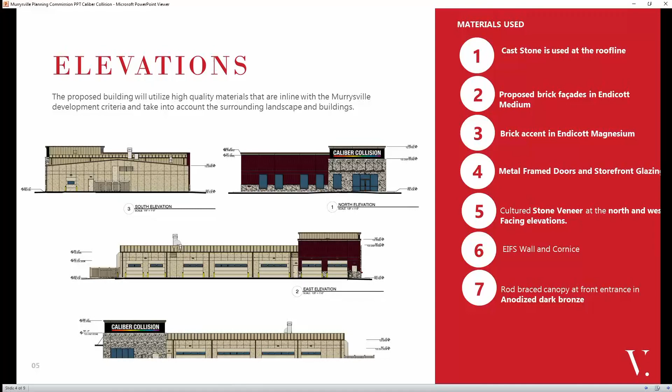Public parking spaces, I should mention, are used for employees. If there's an overflow situation, Caliber will open their gate and allow employees to park in the back. There's really not a whole lot of need for public parking - it's just used for employees.

Okay, what else do I want to mention here? We've got the stone veneer. And again, we can talk about—go ahead.

I have a question. Yes. Caliber Collision, is that a lighted sign? It is an illuminated sign, yes. But it can be—I don't think we've really gotten into that, Jim.

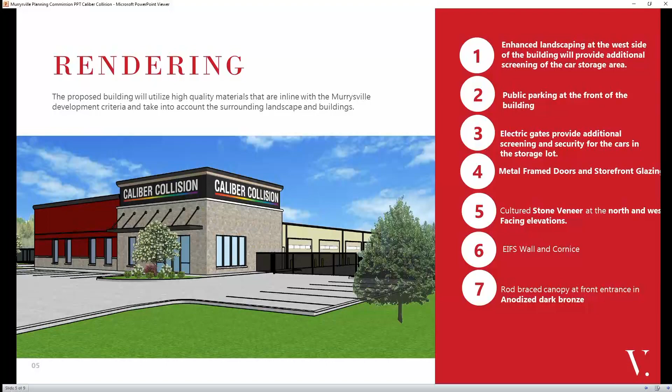No, that's—yeah. It can be individually illuminated channel letters, it can be reverse halo lit. We haven't gotten into that yet, but we will meet your code standards on that.

I'm just concerned about the residential backyards of the folks that are your neighbors. Sure, and I'm sure they don't want to see that lighted sign on Saturdays and Sundays. Sure, and that's something we can work with - whatever standards you have when we submit the sign package, we'll meet those standards.

Okay, not a problem. All right, will you go to the site plan if you can? Again, I want to show these items. Jonathan Barron is here with me from the EADS group, he can answer any technical questions you have. But I want to show you the site plan layout.

Again, the majority of the parking you see here is for car storage. The parking up front is for public and/or employees. You'll also note we're proposing a new access driveway from the highway. I want to let you all know that we have been working with DOT.

We've already had a preliminary meeting and made our first submission to PennDOT for plan review. We have comments that already came back. Those comments were, at the risk of sounding hyperbolic, very benign, very boilerplate. The only real anomaly was that they wanted us to pursue an embankment permit, which we will handle. So no major issues, no public improvements, nothing from DOT other than to meet their standards as you see here.

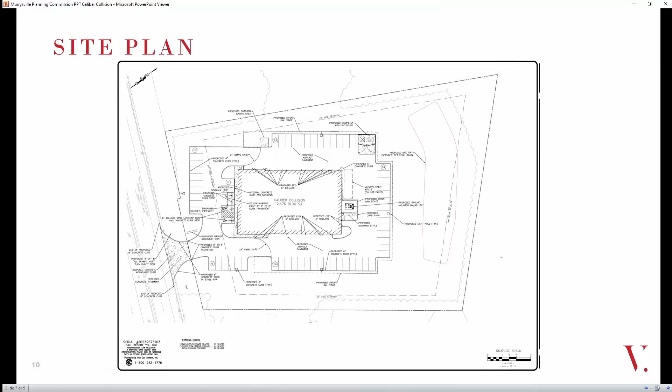The next one I'm going to show you is our landscape plan. Again, the landscaping shown here is per the ordinance, the standards in the development code. You can also see the grading on here, which we can touch on with Jonathan. You can see the retention pond at the back and landscaping all around the perimeter of the site.

What's the purpose of that diversion ditch on this side of the landscaping? That is to collect the water and redirect it around the pond, because if we took the water from the residents, that'd be additional stormwater we'd have to account for in the pond. And where's the outlet for that? There's a rock energy dissipator at the end. So it's not going into a stormwater system? No, it would then naturally sheet flow out the back towards the stream. There would be riprap sized at the end, probably an R4 or R5 riprap, sized based on the velocity we'd anticipate for certain storm events that meets the NPDES requirements.

Why is the ditch close to the property line when it could easily go down the slope at the top of the cuts you're making? Well, stormwater has been quite a challenge on this site from a water quality standpoint. Since we had zero infiltration, we had to make the pond as big as possible on the site and redirect everything away from the pond as best we could. We looked at a lot of different options, and even collecting that additional area made the stormwater pond close to not meeting all the release rate requirements built in for Turtle Creek.

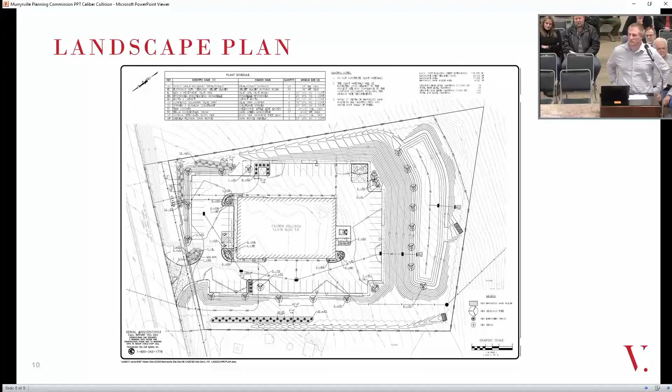So the diversion ditch doesn't really need to be up there along the property line. It could be located further away. We could take a look at it, but I know our requirement is to meet the stormwater standards. I think, to Bob's point, it would help your stormwater if you move that ditch closer to your grading - less water would be going to your detention pond. And that moves it further away from the neighbors, and keeps you off the property line. Yeah, we could take a look at that. I don't see that being a major issue.

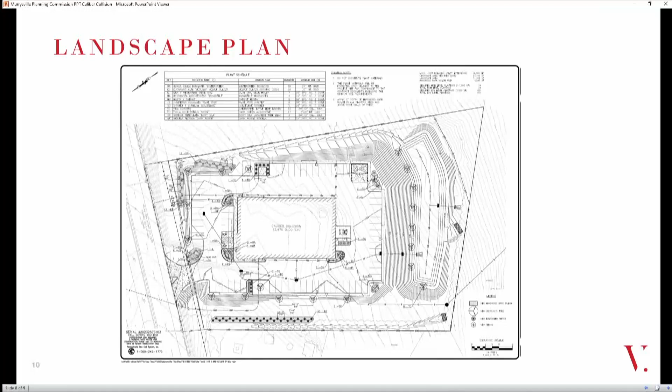So this is your landscaping plan, and I noticed you stopped the arborvitaes - you don't go all the way back with them. What about the other property owners, since you only went halfway? I don't know if you're familiar with Pittsburgh and deer, but those arborvitaes aren't going to be there, so you're going to need something else. Jim mentioned possibly swapping those, and I don't think we'd have a major issue swapping those out for whatever plant you guys would prefer. I saw on the plans those were 6 feet high - I think you're going to need something a little higher. Just my suggestion.

As far as grading goes, we'll try not to take out every tree possible if we don't have to grade in that area. We're only going to grade what we need to. That's why we mostly kept that area undisturbed, because we were trying to keep that buffer between the residential area, understanding there are residents there. The building is 101 feet away, so we meet the requirements for building buffer.

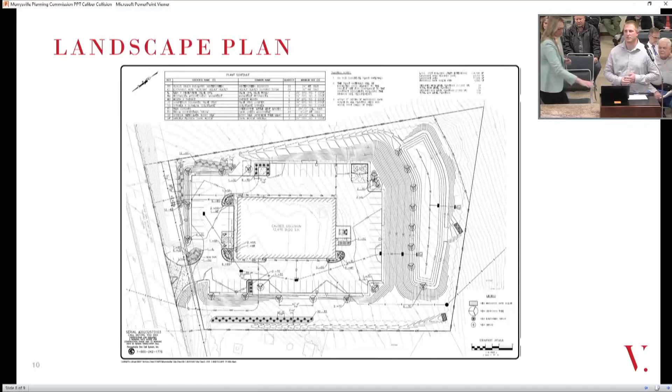How tall is the building? Is it 30? No, 20? Yeah, 21 feet. And I think we're about 10 feet below grade from the adjacent grade of the property at the corner there - the building's about 10 feet lower from a grade perspective. Continuing - the main portion, the service portion of the building is 22.6 feet, and the pediment at the north elevation is 26 feet in height.

26 feet. Yes, ma'am. That's okay.

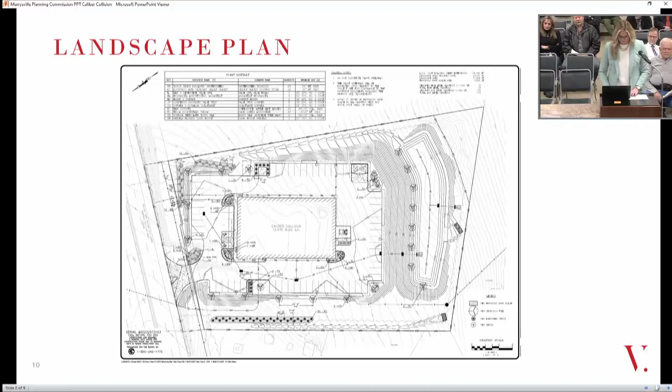I think the last thing I want to show, if you can advance it, is the photometric plan. I know it's a little small here, but I hope everybody has it in their packet. Most of the building lighting is for security purposes, and again, everything is on a timer - the site lights and the building lighting. If there's a concern about shielding it, that's something we can work with everybody on. But what's depicted here shows that the light levels at the property line are 0, which is a requirement per your code, and we fully meet that.

Okay, and with that, we'll conclude our presentation and take any other questions you may have.

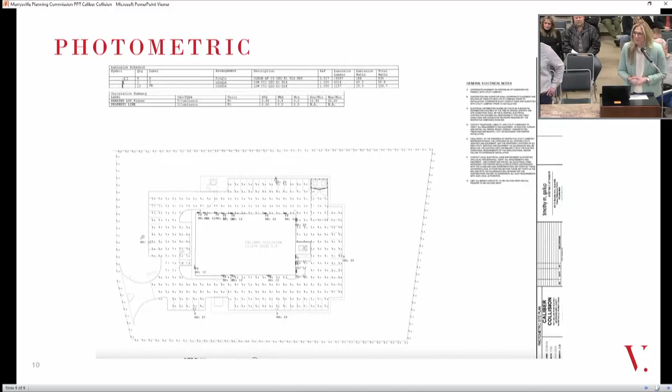The one elevation showed a stack on top of the building. That's for exhaust? Yes, sir. So what's the filtration? What's the effluent coming out? So there is a paint booth, and that is the mechanical equipment that mitigates and controls that.

I think part of the request that Jim had noted was that we provide an air quality study, so we will provide that, but the equipment is state-of-the-art. It meets all the necessary requirements for environmental standards for effluents.

What is the status of your permitting through DEP for the paint booth? I haven't submitted that yet. We haven't kicked off all of our details yet.

Okay. Yes. Bob, do you have something you wanted to ask? No, she's done with her presentation. I'm sure planning commission had several questions.

Yes. So in looking at the plans, I noticed that the sewer line is coming up on the west side of the building. What's the plan for when you get your subdivision for the next lot? Why not bring that sewer line straight up the middle with a main so it could be utilized by the other lot? Would you be able to bring up that plan?

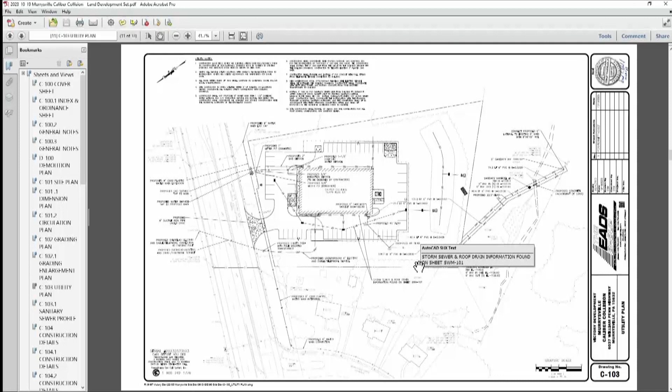Well, a main line extension is a different thing than what we're doing. We're basically just taking our lateral underneath the stream. We've had a lot of discussions with Bob Swarmer over at FTMSA, and it seemed like that made the most sense - it's kind of a straight shot to the stream. We even did a sanitary sewer lateral elevations study, which was part of the plan submission, so it's a straight shot from the building to tap in close to where that manhole is.

We had 3-foot clearance underneath the stream, so we don't have to concrete encase the pipe. We did look at moving it the other direction up the line, to the west, but we weren't able to get that to work, so we had to move it further down. We did reach out to Bob Swarmer and asked him about the adjacent lot, because we recognized that was one of the comments - that's got to be a buildable lot.

So we would need to either get some direction from Bob and see if we would need to provide an easement - either a blanket easement or a dedicated easement. But if that's the case, you'd almost need to design it at that point. So that was kind of our question to Bob, how he wanted us to move forward with the adjacent lot. I think you need to look into that a little further, just to be sure you're putting it in the right place.

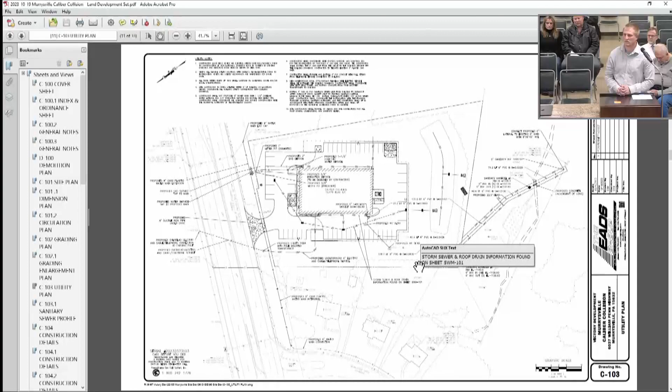Questions? Yeah, in the public comments from last meeting, there was concern about the distance between Berkshire Drive and the entrance to your new building here. What is that distance, how many feet? Well, I think it's several hundred feet. I don't know.

We'd have to do a water main extension from a meter that's at the corner of Berkshire and the highway.

Could you get by the microphone? Yes, please, you need to talk into the microphone. Sorry about that. That's all right.

While I'm talking, I'll try and find the email from Ron Holsopple. We have to do a water main extension because there's not a water main in the highway for us to connect to. So the Water Authority has asked that we extend the water main from the east. There's a blow-off at the hard corner there of Berkshire and the highway, and I believe the extension, coming all the way from that point to our access drive and across, is - let me find it, give me one second.

Are you talking about extending it all the way across the 8 acres for both lots? No, we would just extend it to the corner of where the proposed lot subdivision is. He was talking with Ron Holsopple - we need to provide a 50 by 30 easement for a station, I think, a future regulator station.

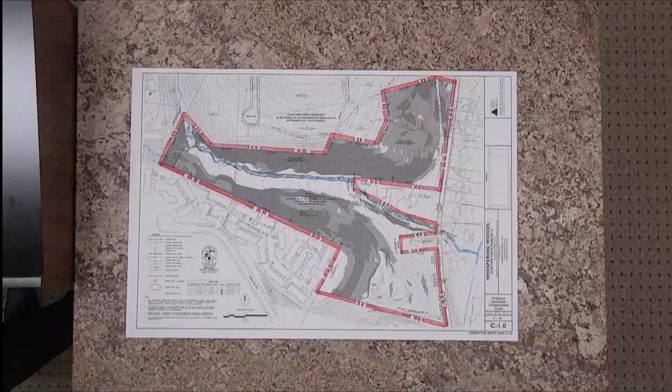The red is the outline of the property. The steep slopes are designated here in the darker gray, and that's the 40% and over. 25 to 40 is in the lighter gray, and then the white is less than 25%. I have denoted also a stream that crosses the property in blue from left to right, east to west.

Logan's Ferry on this particular plan is on the right-hand side as you're looking at the screen. There are a couple adjacent single-family homes that are accessed off of Logan Ferry as well that are sort of fingers, and you can see them jutting in off of the road.

The property is proposed to be developed into 5 single-family homes and the remaining parcel C1. The single-family homes exceed the 20,000 square foot minimum. Let me show you.

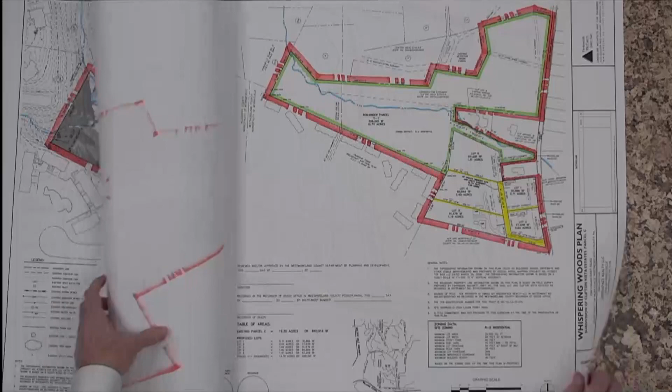This exhibit is the tentative, or general, house location plan. The 5 lots are outlined in yellow, and they're accessed by a 30-foot wide private driveway easement, generally following the existing driveway up along the lower property line, or the southern property line, on this map.

What we were trying to do is minimize the excavation needed to improve the driveway to get to the buildable portion of the property. That location also works well for sight distance left and right because that's at the high point of Logan Ferry Road, so you can see the greatest distance back toward Sardis Road, and then to the left as we come down the valley, coming down the hill from Monroeville in that direction.

The lots will be serviced by underground stormwater detention systems shown against Logan's Ferry Road. Those would be underground systems. We did do soil testing, and there was no infiltration. We did 5 different test locations, and there was no measurable infiltration on the property.

These would be underground systems. All of the stormwater from the individual homes and the private driveway would drain into these facilities. They would be held there for a short period of time and then discharge into the storm sewer system in Logan Ferry Road, which would then discharge into the tributary that's at the bridge.

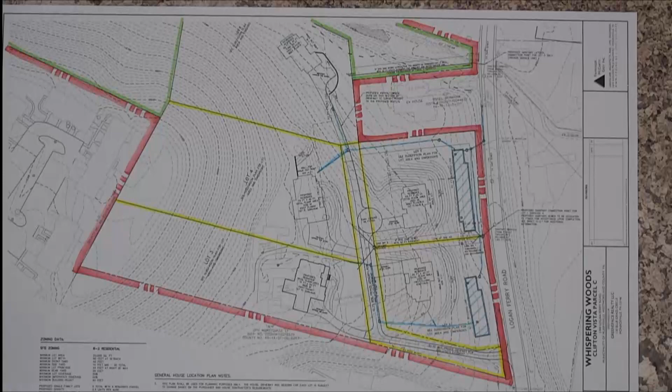Yeah, that 90-degree turn is going to be very difficult, right in here, as well as a little bit different possible profile as the driveway comes off of Logan's Ferry Road. On paper, it's relatively steep, but actually as you drive it, it's not as bad. What is the slope?

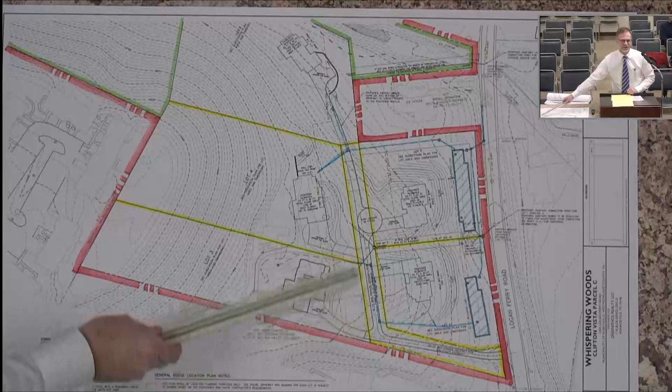I believe we have the slope set at 13 to 14% in some locations. We transitioned at the intersection with Logan Ferry, and as we come up around the curve to the fronts of the houses, it also transitions off and levels along the top of the property. Where, Jim, is 15% slope our maximum? So they're under that, okay. In the plan set, we did have a profile showing how the driveway worked.

At this time, we haven't had a lot of time to study what the fire department has asked for, but I don't think that's going to be a problem to adhere to. Well, you have to satisfy them first. I certainly understand that, you have to be able to provide service to those homes, and we certainly wouldn't want to build something that wouldn't be accessible by emergency vehicles.

So that driveway is sloping away from Logan's Ferry, right? It slopes down to it, at like 2%.

I didn't see, where is that water going? The stormwater runoff from the driveway? Right, so currently that driveway acts as a drainage channel. I was actually out there when it was raining, and I said I've got to take some pictures for my engineer. It actually comes down the driveway and comes back toward Sardis Road.

So the high point is just -- if you're coming down the driveway, the high point of Logan Ferry is about 25 feet to the left or north of this driveway. So what we've calculated, and why the inlets are the way they are, is that we're not increasing the flow along that driveway based on this design and how we've captured the runoff from the homes and the grading as shown. So that point of interest is the same or less than what's currently going there.

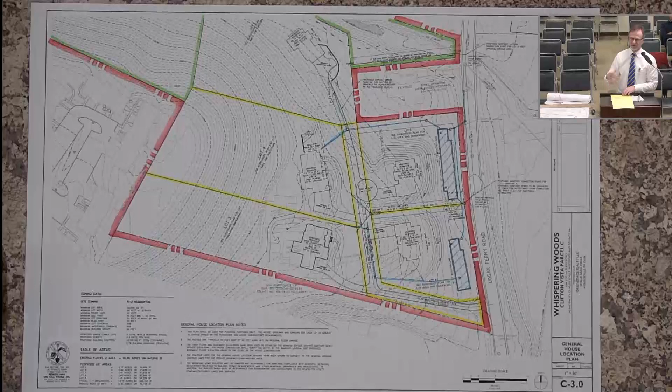That will impact the review of stormwater, soil erosion from construction activities, as well as riparian buffers off of streams, which we're also working through with them.

Okay, Bob, you have a question? Oh, you guys go ahead.

I don't see how you can get emergency vehicles up this hill, make that almost 90-degree turn, and then have a place to turn around and get back down the hill.

Yeah, we have, as I mentioned, an email through Jim's office, and if I could paraphrase for the commission here, the last 3 points on his recommendation was a minimum driveway width of 15 feet, the absolute minimum width for the ladder truck to be set up.

So that was from Mr. Mahoney at Murrysville 1. Hey Brian, I noticed that your slope map, I think it's on one of your first sheets, indicates that there's a lot of building and grading that's going to be in the steep slope area.

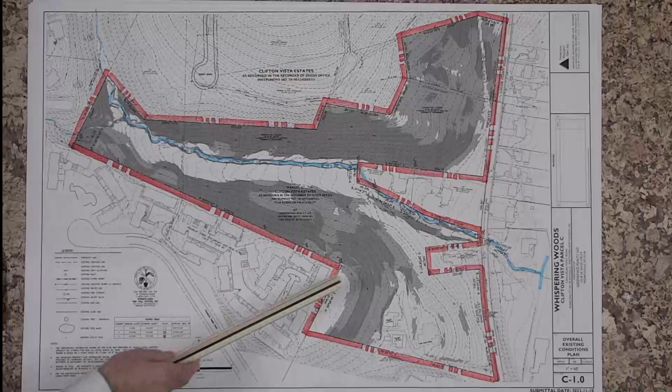Is that correct? Generally, we stayed away from all the very steep slopes. We may have some in the steep slope areas. Lot number 5, lot 5 is bordering those two slope designations.

We had PA Soil and Rock do both the infiltration testing and geotechnical investigation. We know that there's some comments in the briefing, and I've talked to Adam over there again today, and he's doing stability analysis and slope analysis needed to show that our slopes are okay and compliant.

Okay, so you got your geotech working on it. Yes, we do. Thank you.

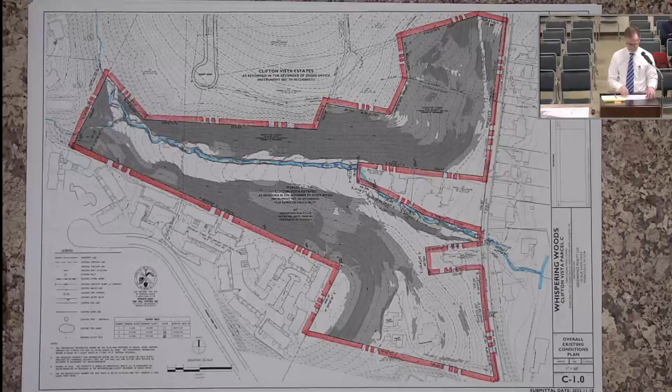Just a comment, it looks like you have a 40-foot turnaround next to a driveway, so it looks like you could turn a truck around?

Yeah, and actually part of the other comment from the fire chief was, understand that may not be code specified, but private driveway width, 10 foot up the hill is really tight, 12 foot across the top is better.

What did he say about the turnaround? The turnaround isn't a necessity, but it's half the size needed for fire trucks. They will be backing all the way out onto Logan Ferry, not a major issue.

So we thought we would attempt to accommodate with this private driveway for sort of a turnaround for the residents to use, a convenient turnaround, but also try to incorporate a driveway as well to have a little extra room if need be. But the fire chief didn't even seem it was necessary.

So I'd still work with him and the municipality. Right, but I sort of have the same thing. It's the truck's going to come up. I think they make do, how they make do, as long as we got the width of the driveway wide enough for them.